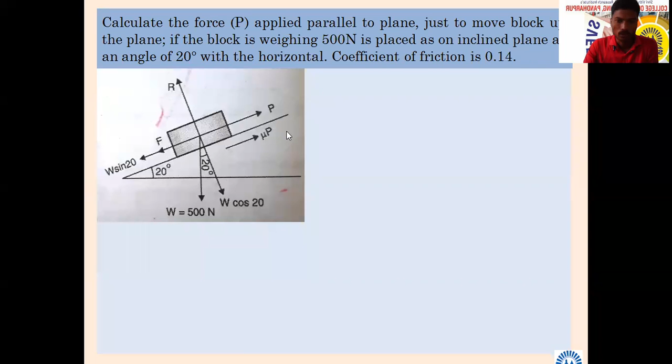Okay. Shall I ask randomly for the answer of this? What were we supposed to find? The force which was applied, no? Okay. Dheeraj, roll number 16. Will you tell what is your answer for this? P is equal to? Dheeraj, what is your answer for P? Sir, I have not solved. Very good.

Roll number 14. What is your answer for P? Not solved. Very good. Piyush, roll number 19. Piyush, what is your answer? Roll number 19. Okay. Pandurang, roll number 36. What is your answer for P? Sir, I have not solved. Okay. Very good. Nihal, 42.

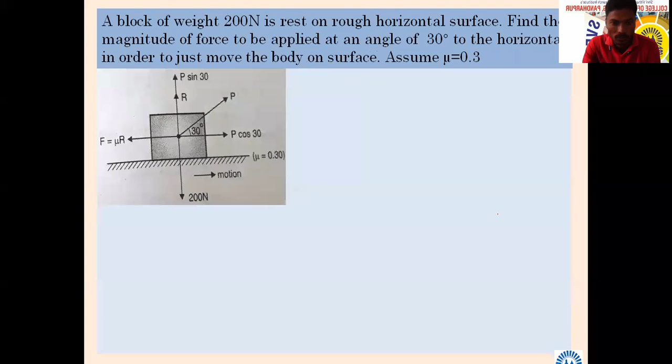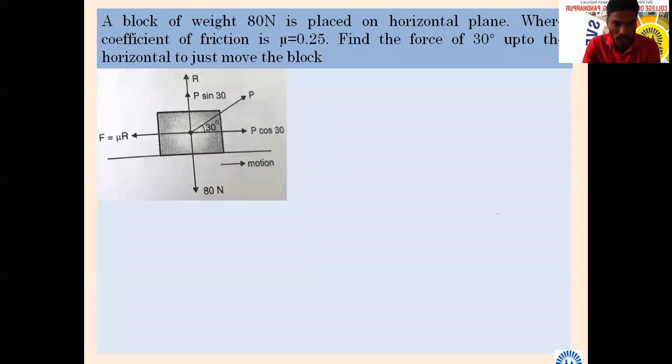Okay, for those who have not solved, we will solve quickly. Tell me what is given in this problem. This problem is something like our earlier problems, where force was applied and the plane was horizontal in all the cases. There was no inclined plane in any problem. So the first change in this problem is that the plane is inclined through a certain angle. Then the remaining procedure is the same.

In earlier problems, you were resolving the forces along the plane and perpendicular to the plane. Here also, the same procedure you have to follow, along the plane and perpendicular to the plane. But in this case, the plane is inclined to the horizontal. It is not a horizontal plane. So what W is given? What is the weight of that block? 500 Newton.

Coefficient of friction, mu, given 0.14. Then anything else given? Angle is given, 20 degrees. Can we say that angle is alpha? Yes or no? Why? Alpha means what? Angle of repose. Is it angle of repose? Yes, sir. How? Is it mentioned somewhere?

Is it mentioned somewhere that when the plane is inclined at an angle of 20 degrees, the block is just about to slide? Is it mentioned somewhere in the problem statement? Just read. Is it mentioned that when the plane is inclined to the horizontal at 20 degrees, the block is just about to slide or move? If it is mentioned, where? Sir, angle of repose, first line. Where? Calculate the force applied parallel to the plane just to move the block.

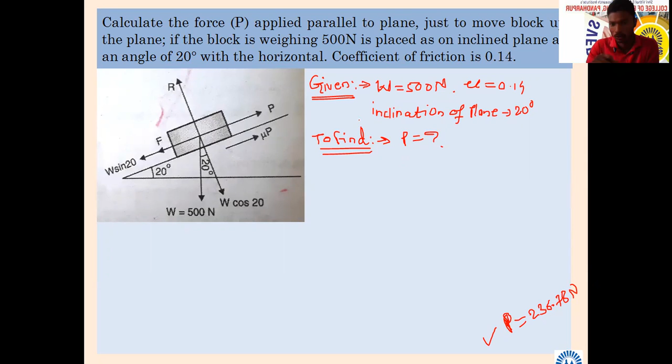Whatever problems we have solved till now related to friction and this block, what is the change? Yes, in this problem, the plane is inclined. In the previous problem, the plane was horizontal. हा जर लक्षात डिफरन्स आला तर हे प्रॉब्लेम सोपे. Only along the plane and perpendicular to plane. Other things are all same.

Okay. So here a block is there of weight 500 Newton. So we know the angle made by the plane with horizontal is equal to the angle made by the reaction with vertical. These both angles are equal. So if it is 20 degrees, then definitely this will be 20. Is there any problem?

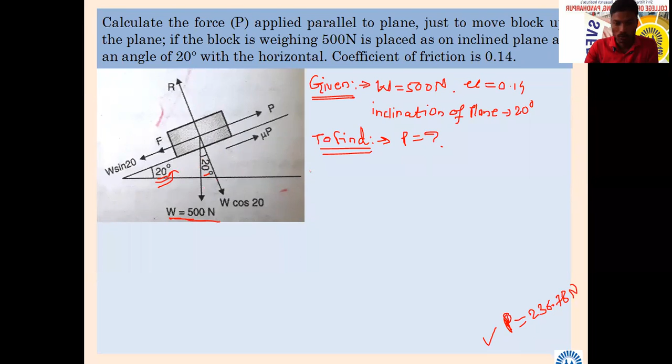Then resolving the forces, shall I say horizontally or vertically, or shall I say along the plane and perpendicular to plane? Along the plane and perpendicular to the plane. Okay, so this W will be inclined in that case, so that W force we have to resolve along the plane and perpendicular to plane. W is making an angle of 20 degrees with the perpendicular, we can say.

Now one thing you have to remember, actually that W itself is vertical. आहे का तो vertical? W 500 Newton. Yes, sir. It itself is vertical, but we want to resolve the force along the plane and perpendicular to plane. That's why though it is vertical, we have to resolve it, and we know the angle made by 500 Newton with the perpendicular line and parallel line to the plane. So it is resolved here: W cos 20, W sin 20. So in this way, we will proceed. Okay.

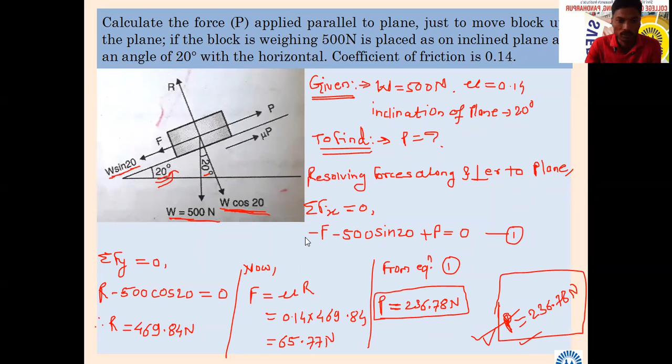Next problem. Have you noted down this? Yes, sir. Next. Who will read? Can I, sir? A block weighing 100 Newton is on a 30 degree inclined rough plane. If coefficient of friction is 0.25, calculate force required to be applied parallel to the plane to make the block slide.

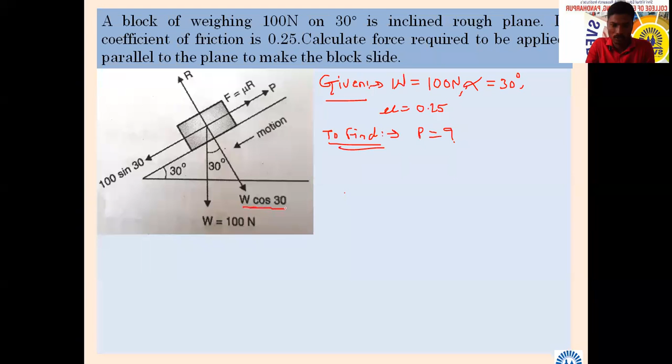Again, this W, you can resolve; already this is in the figure. It will not be given. If this problem is there in the exam, this resolution is already given here because I took this image from one of the books. It may not be there in your exam. Apart from this, 100 sin 30 and W cos 30.

I will wait for 2 to 3 minutes. Done? What is your answer? 28.35. Same, sir. 28.35. Okay, I will check. Just wait, others will still solve. Is it over? Yes, sir, same answer. Okay. Sir, the problem is simple.

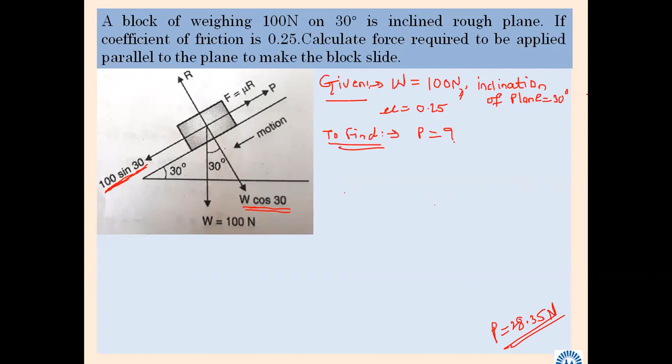Tan alpha is equal to mu. Okay, both things are known, so it may be okay. Okay, then let's see how much it comes. If tan alpha is equal to mu, we know mu, so you can calculate alpha. Alpha is equal to tan inverse of mu. Calculate, just check how much it is. Tan inverse of this 0.25, just check how much it is coming.

14.03. Yes, I have just told now. 14. Yes, sir. 14.1. 1 or 0? 1. 03. Okay. Let it be. It is 14 point something, means whatever I have told. This 30 degrees is more than alpha.

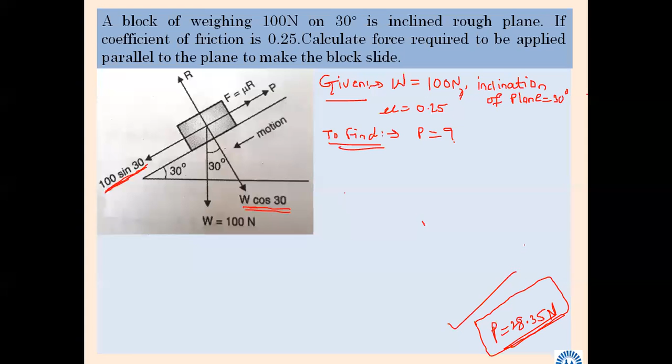28.35. Again, many more problems are there, I think. We will see. If there is change, we will solve. If not, you can take for homework tomorrow. Okay. If method is same, there is nothing. Just check what is there in this problem. Calculate force P applied parallel to the plane just to move block up the plane, if the block is placed on the inclined plane at an angle of 20 degree with the horizontal, coefficient of friction is given. Here also P you have to find.

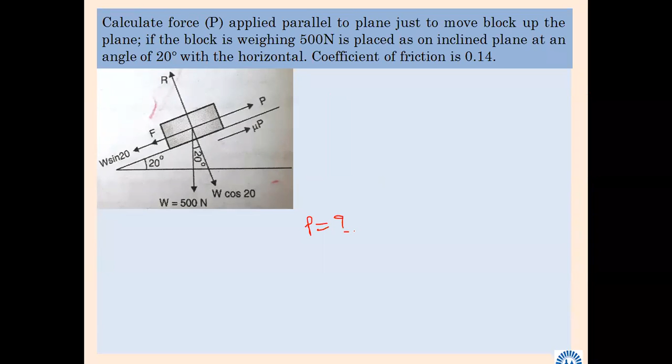Yes, sir. Okay, just wait. Maybe there is a repetition. I don't know. Same. I think it is also same. Okay, this you can take as a homework. Tomorrow you can solve. Here also we need to find P. We will solve one ladder problem so that this chapter will get over. Okay, just take screenshot. Try to solve it. Method is same. Okay. Shall we go next? Yes, sir. Next.

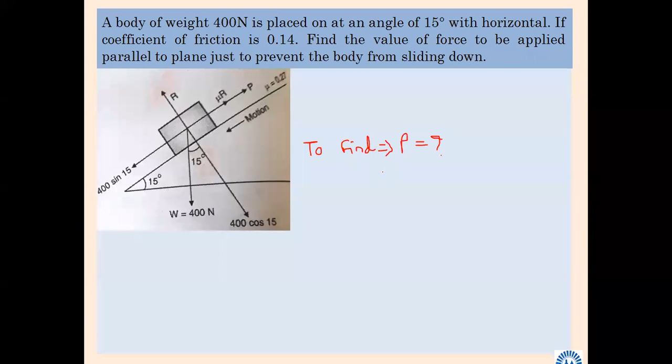Ladder problem. There is one special problem. It's likewise beam. We have seen problems on cylinder or sphere. Then we have solved problems on beam. Then we have solved problems on friction. Then last type of the problem from the equilibrium chapter is problems on ladder. But it is very rarely asked. Are you knowing ladder? Yes, sir. So problems on ladder. This is rarely asked, but still, as a part of syllabus, we will solve one problem. Okay. So what is this?

So who will read? Very lengthy problem. I will read. A ladder of length 4 meters and weight 200 Newton is placed against the vertical wall as shown in following figure. There is one ladder whose length is 4 meters and its weight is 200 Newton and it is placed against the vertical wall. Two coefficients of friction are there. The coefficient of friction between wall and ladder is 0.2 and that between floor and ladder is 0.3.

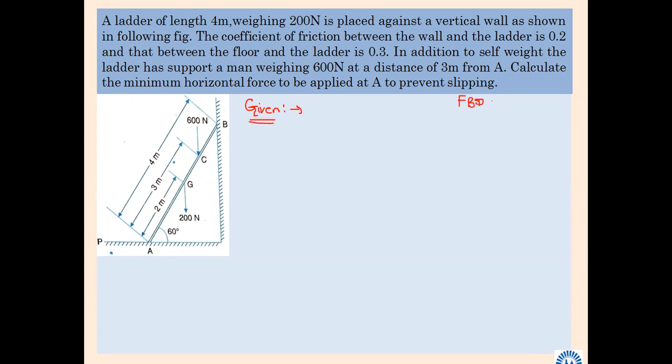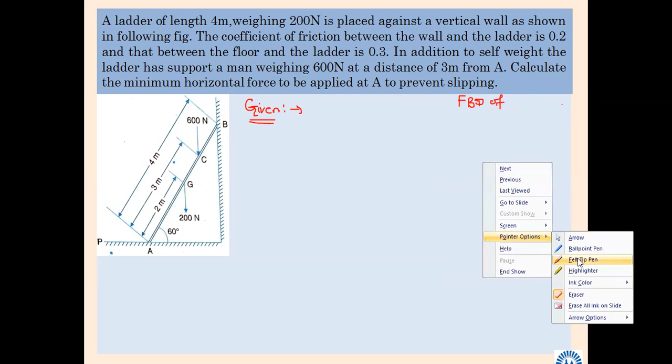In addition to self weight, the ladder has to support a man weighing 600 Newton at a distance of 3 meters from point A, means from the bottom. Calculate the minimum horizontal force to be applied at A to prevent the slipping. Just read it and let me know what you understand from this. This is the last problem from the chapter. Let me know who is going to explain this. Is there anyone who will explain this? You can take help of Marathi, no matter. What is given and what we are supposed to find?

Here's a ladder, suppose, standing like this. First thing, number 1, self weight is given as 200 Newton. Where will it act? Exactly in between, yes sir. Either you can show it this way or here, like this. 200 Newton. Then a person of 600 Newton is here, maybe somewhere here.

600 Newton, okay. 600 Newton. After that, just checking what we can do next. Sorry, I haven't started the camera. After that, 600, 200, now frictional force. We have to show frictional force.

So in case of a ladder, there will be two forces, there will be two forces, just keep in mind. One will be perpendicular, meaning reaction. Here there will be reaction, something like this, reaction RB. And then there will be frictional force as well. In a ladder problem remember, there will not be only frictional force, but there will be reaction as well. That reaction is also there.

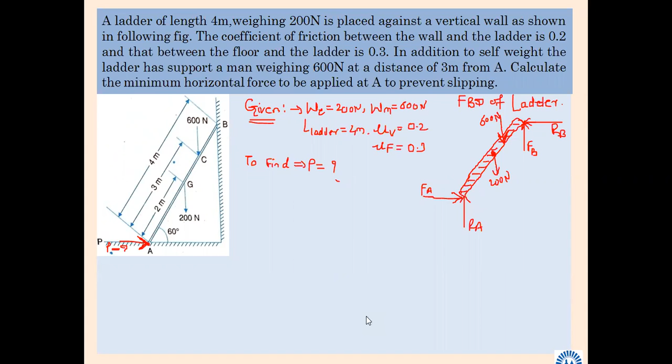One force, actually our force, is remaining, no? Are you with me? Where did we show the force in the free body diagram? Whatever force we want to apply, that force will be along friction, along friction itself will be force P. And here FA is equal to mu RA. I will write here, don't worry, here it will be very complicated. So FA...

So FA, here I will write, the distances I haven't given. FA is equal to mu RA and FB is equal to mu RB. These two equations will be there. So in this FBD, total how many unknowns are there?

How many unknowns are there, tell me now. In this total FBD, how many unknowns are there in total? 5. Which are they? FA and FB, frictional force at A and frictional force at B, we have converted them into reaction, no? RA and RB.

Two are eliminated now. We have converted that frictional force at A into its reaction because we know F equals mu R. That's why we converted the frictional forces.

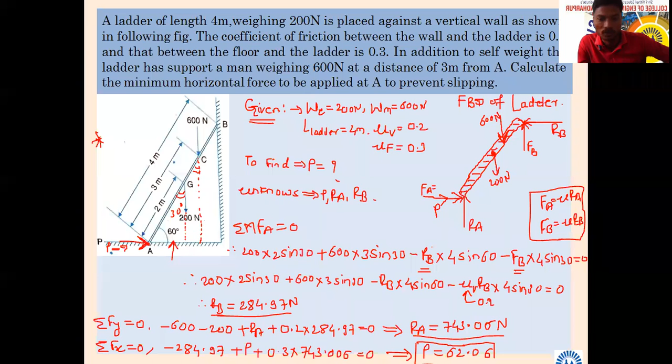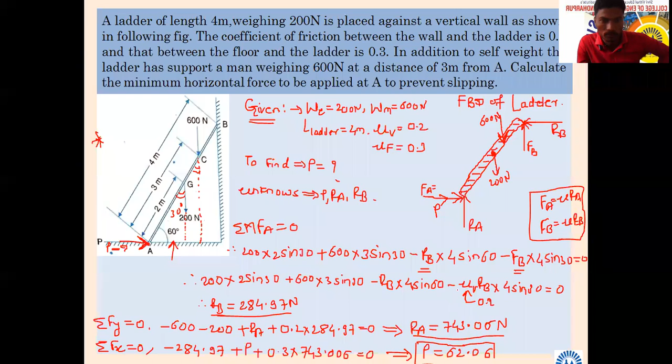This problem we will not solve, it is very very difficult - difficult means lengthy, not difficult as well.

Now here that is different. The principle of virtual work states that in equilibrium, the virtual work of the forces applied to a system is 0.

What is the work done formula in terms of force? What does physics tell us, what is the formula? Work done is equal to what? W is equal to force into displacement.